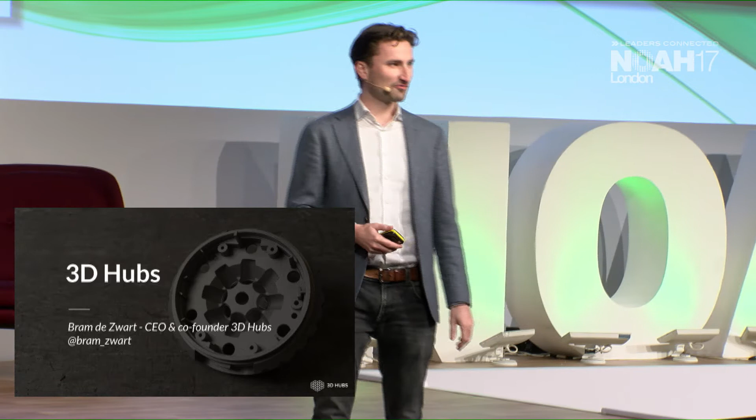Hi, my name is Bram. I'm the co-founder of 3D Hubs, the world's largest online marketplace for 3D printing services. We've connected 6,000 companies through our marketplace that offer 3D printed parts as a service.

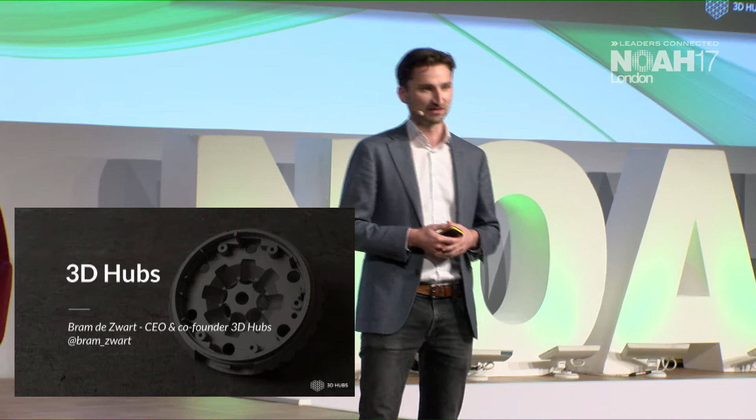You've probably all heard about 3D printing by now, and may have wondered, is this just hype or is it real?

Products were made by hand, which is not very scalable. At the same time, production was also very local and on demand, so there was hardly any inventory or long-distance transportation.

Then we got the industrial revolutions, which led to automation and centralization because of economies of scale. Eventually, most of this production moved to Asia because labor costs are lower there.

Secondly, there's a lot of waste transporting all of these products from Asia to consumers all around the world. And finally, in this centralized manufacturing model, we've created around $2 trillion in inventory, which is more than the GDP of Canada. An estimated 30% of this has to be thrown away because nobody wanted to buy it.

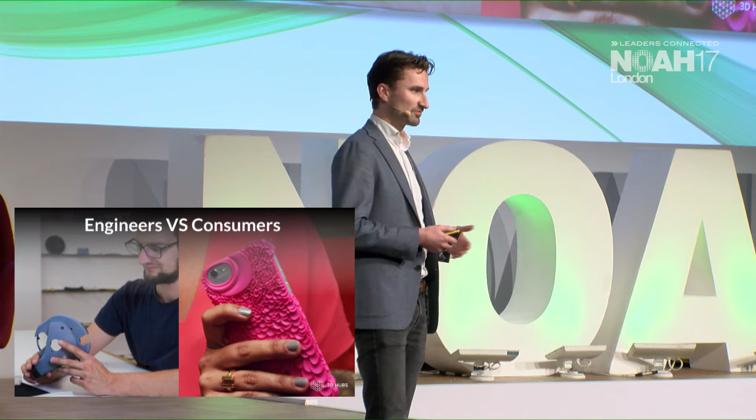So who are the users of 3D printing today? There's been a lot of hype centered around consumer 3D printing, but about 90% of the market is engineering applications. At 3D Hubs, we serve hundreds of thousands of engineers.

They use our self-service platform to get prototypes and industrial parts made, by uploading their CAD files, selecting the material they want to print in, and then the facility or provider they want to order with. On each of these orders, we take a 12.5% commission.

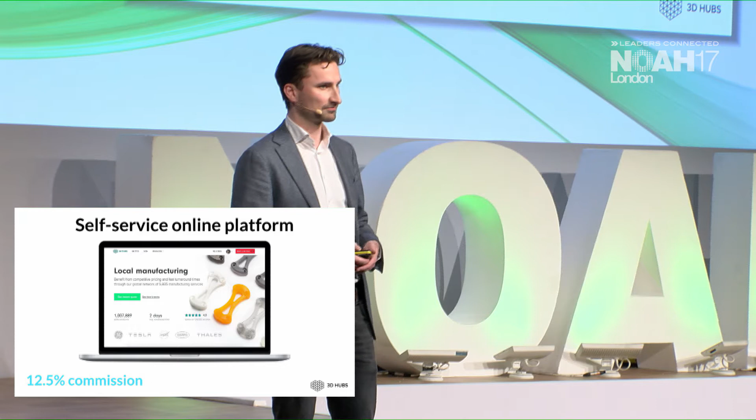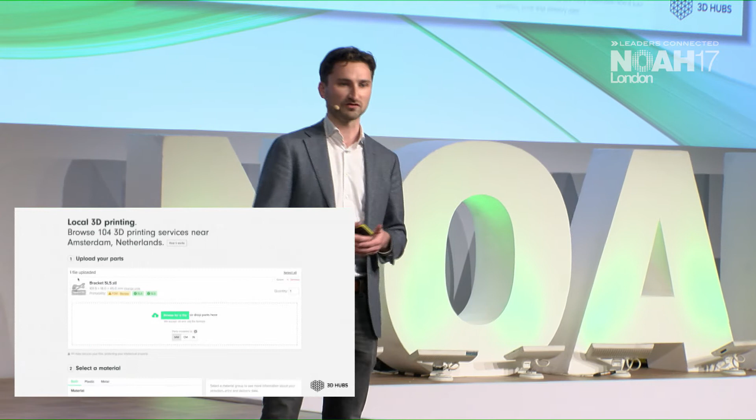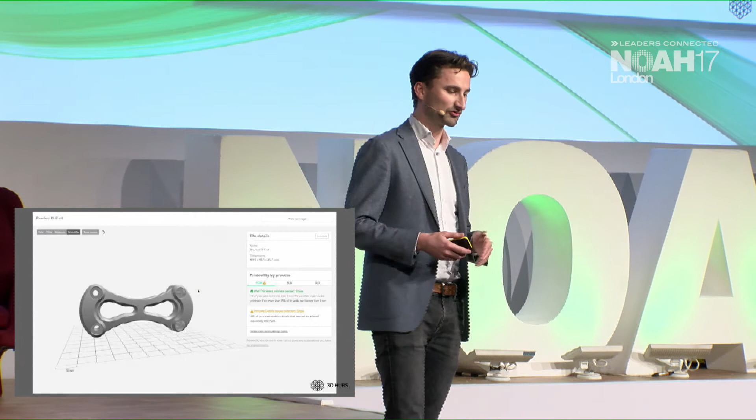This is a short video showing the ordering process. First, the CAD files are uploaded. Then we perform all kinds of analysis on the files to calculate the instant price for each of the local providers, and we also analyze the manufacturability of that particular design for different 3D printing processes. This is really unique in the market, and it helps customers select the right 3D printing process for their design.

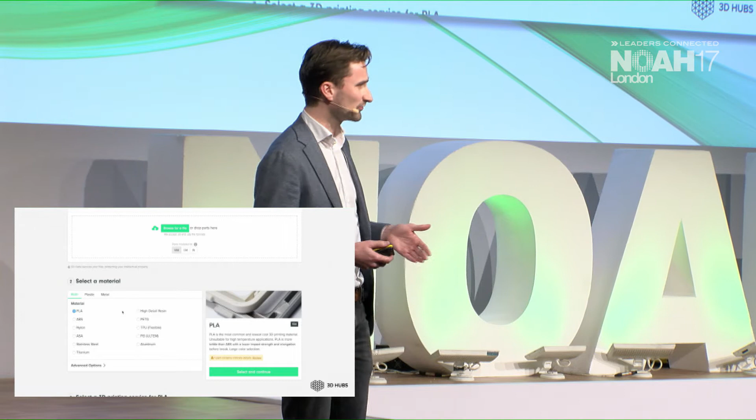The second step is selecting the material. You can print not only in many plastics, but also metals and rubber-like materials. Over the last few years, dozens of new materials have been developed for 3D printing.

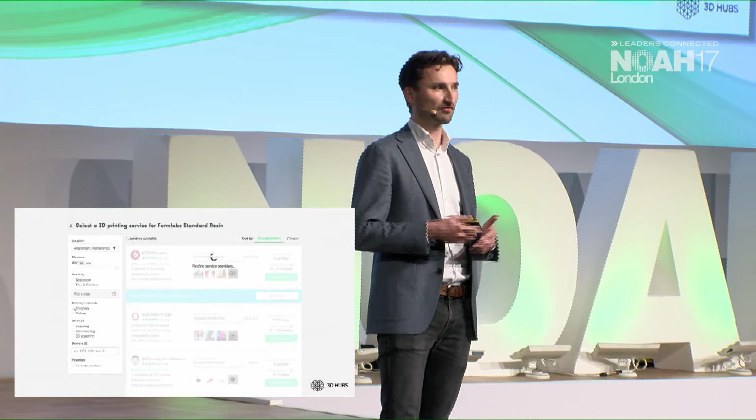Then the final step is selecting the provider. We provide all kinds of sorting and filtering options for customers to find a provider that meets their budget, lead time, or quality requirements.

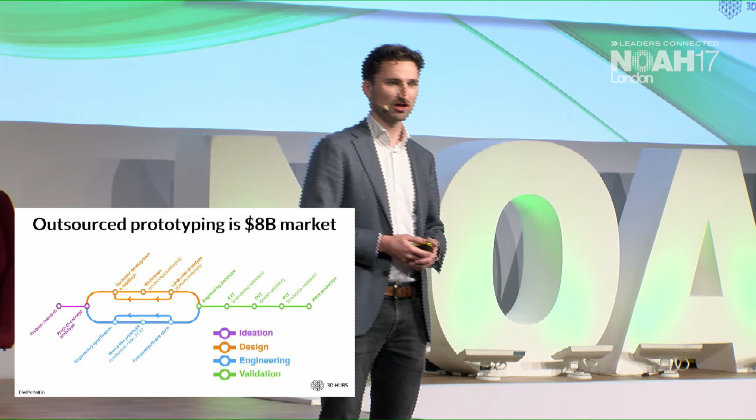The main use case we see today is prototyping, and this is an $8 billion market. This is a lot larger than most people would expect, but in product development, engineers can go through dozens of iterations throughout the ideation, design, engineering, and validation stages.

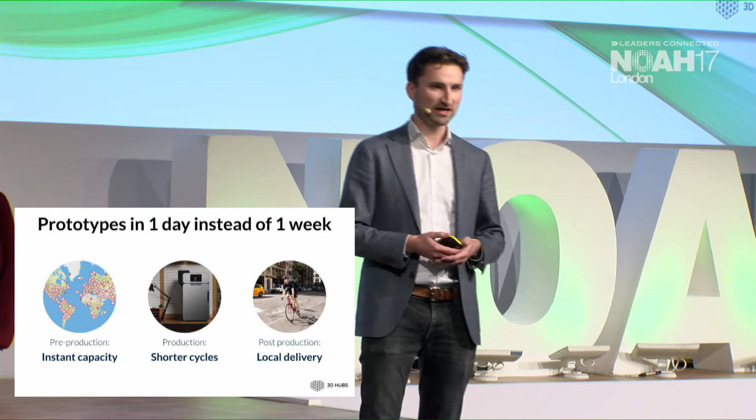And so we help engineers get their products to market earlier than their competitors. We do that by providing a prototyping service that is about 7 times faster than that of centralized 3D print providers. This is because, first of all, we have 6,000 manufacturing facilities in the network, which means we always have instant capacity available.

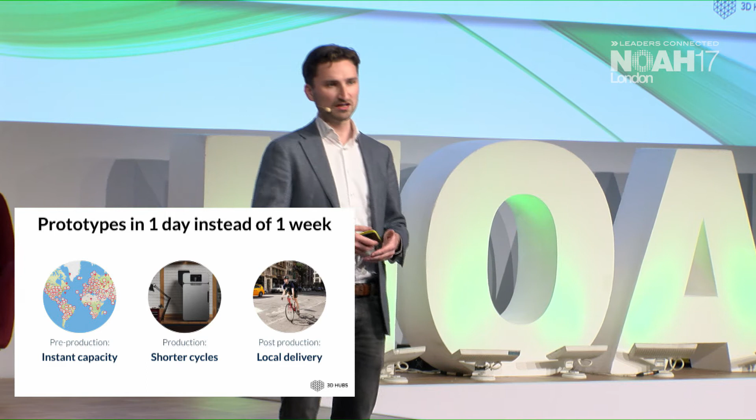Secondly, we typically produce on smaller machines that have shorter production cycles, as we've never optimized for centralized scale. And then finally, with such a large distributed network, around half of our orders can be locally delivered the same day.

So thanks to this unique selling point, our customers have ordered 1 million parts since we started 3D Hubs in 2013. It took us 40 months to get to the first 500,000, and only 10 months to get to the second 500,000.

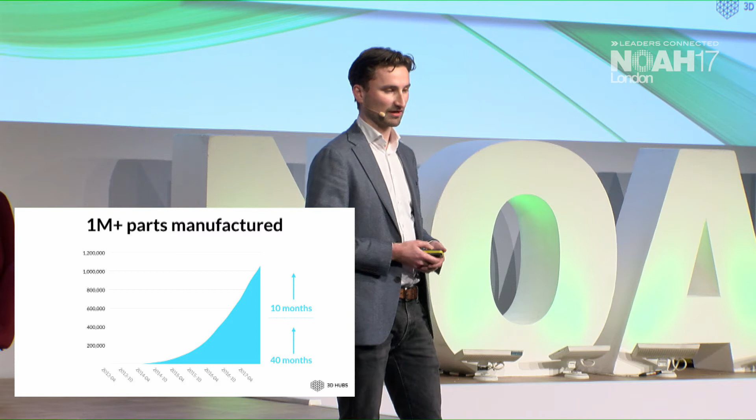And as the network grows, our service becomes faster and more reliable, and customers start trusting us with more of their projects. This is reflected by the lifetime value already increasing by 60% this year.

So the prototyping market shows a lot of promise still, but the real big opportunity is in the production of actual end parts. And we're seeing some really exciting developments happening there.

Stryker is investing $350 million in the production of titanium implants, such as hip implants. About 100,000 implants have already been installed in patients, and the survival rate is twice as high as the 3D printed lattice structure grows much better into the bone.

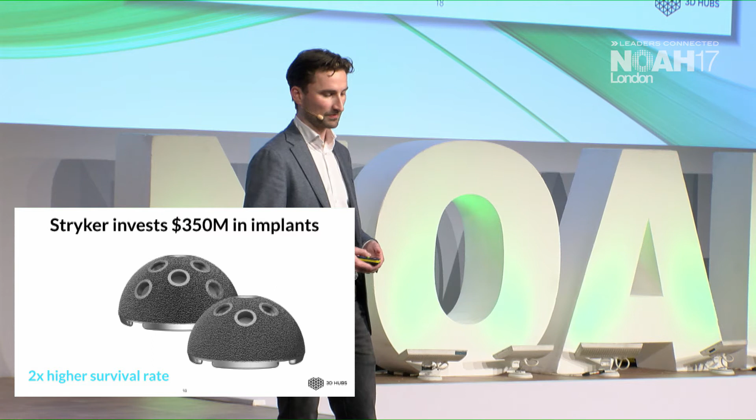And then GE is investing $3.5 billion in the production of titanium 3D printed airplane parts, such as fuel nozzles and interior brackets. Thanks to the design freedom of 3D printing, they can save up to 55% weight compared to traditional manufacturing.

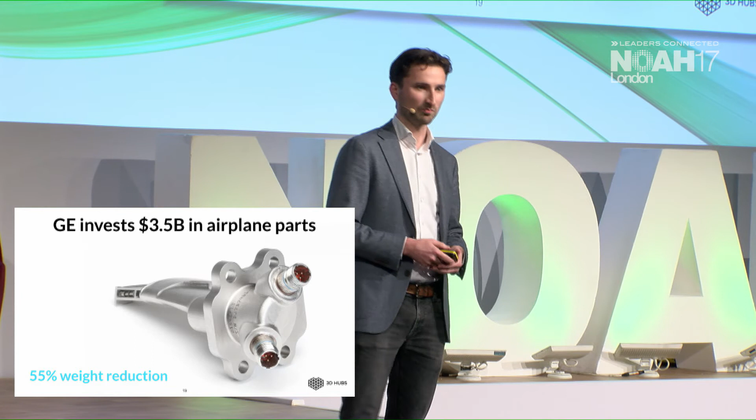And a lot of these big industrial companies are already using 3D Hubs for their prototyping, and this really puts us in a solid position as they expand into end parts.

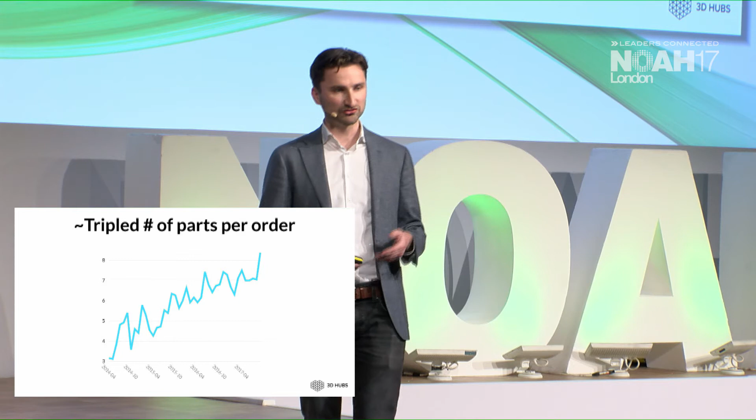And we're already starting to see more orders for end parts. This is reflected by the average number of parts per order already tripling in the last few years.

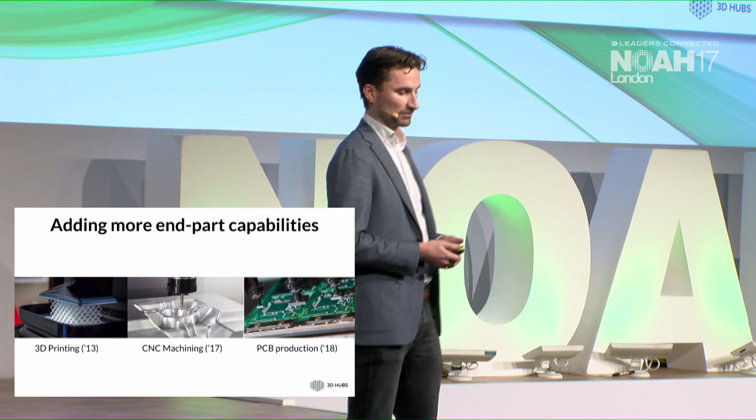And to better serve the need for end parts, we're adding more computer-controlled manufacturing technologies, such as CNC machining, which is also used to produce the cases of the MacBooks.

And this is a very promising expansion, as the average order value for CNC is 20 times higher than for 3D printing. So for example, a customer ordered this aluminium box for 8,000 euros and is planning to order 15 more of them.

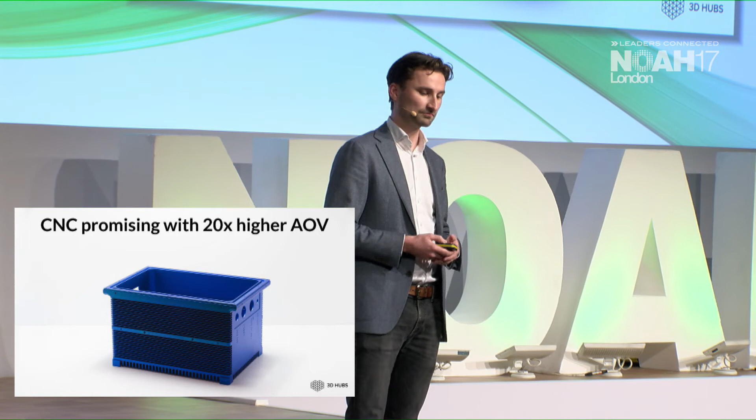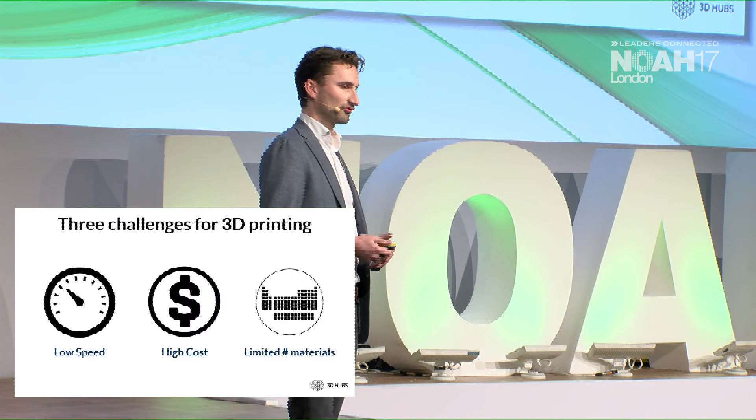So let's have a look at the machine developments that are enabling this transition from prototyping to actual end parts. The three main challenges for 3D printing have traditionally been the low production speeds, the high production costs, and the limited number of materials available.

But this is all being resolved by new machine developers that have come up with radical innovations. One of them is Carbon, that has raised over $200 million for a new 3D printing process that is 50 times faster. And they already started shipping their first machines.

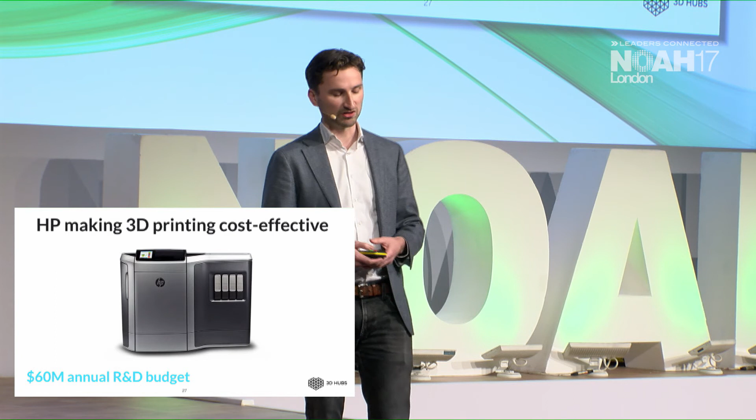And then HP also started shipping their first 3D printers last summer. They have a $60 million annual R&D budget to make 3D printing cost competitive with traditional manufacturing. And then there's Desktop Metal that has raised $200 million to make metal parts more affordable and more accessible.

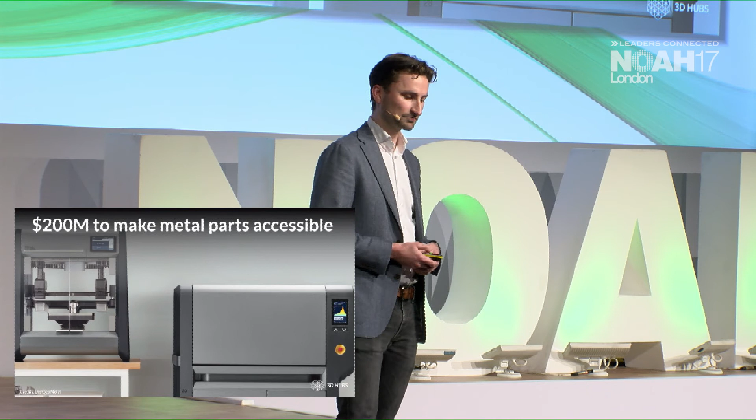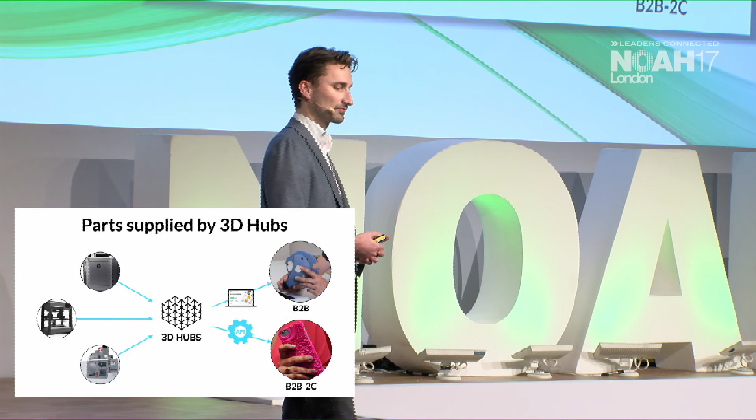So all of these machine developments are very exciting, but customers, of course, really care about the parts that they produce. And 3D Hubs is the fastest online parts provider and often the first to offer these amazing capabilities.

Our investors include Balderton Capital, EQT Ventures, and Arthur Kosten, who's co-founder of Booking.com. And they've invested $12 million on the shared vision that the winning online parts provider is going to be a lot bigger than the actual machine makers.